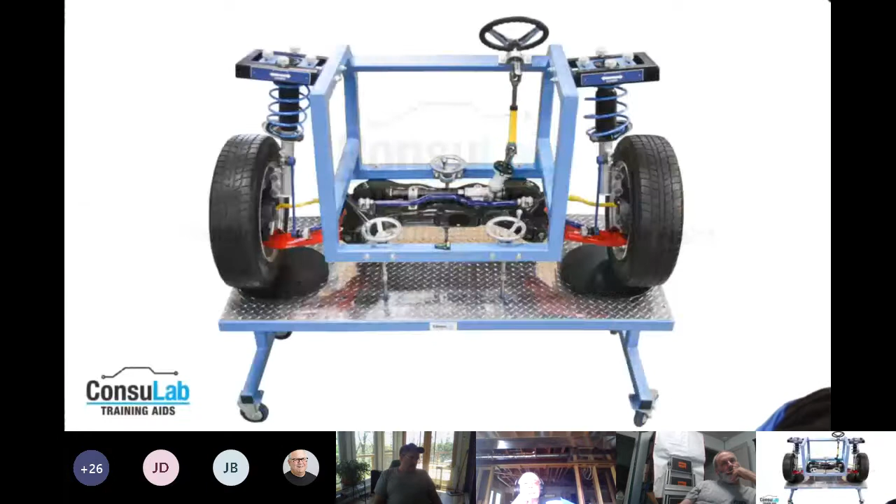So I'm going to switch to that. And again, here's the title that we're going to deal with, and what we're going to deal with here is using a lot of virtual shots of this trainer.

This trainer is our EM130 steering and suspension trainer. It's based on a Hyundai Accent, but it really wouldn't matter what vehicle it is because we've changed so much about it. A couple of things we've done is we've actually added adjustable plates to the top of the strut, so you can actually change camber and caster up there, which is not part of this car normally.

We've also got some adjustment handles here and on the other side that allow you to change the ride height of this. You can actually change the tilt of the frame, those types of things as well. And then it's all mounted on a rolling platform and has turntables below the wheels and tires. The springs on it are actually not springs, they're just a piece of plastic hose so there's no undue loading on steering and suspension as we try to use this.

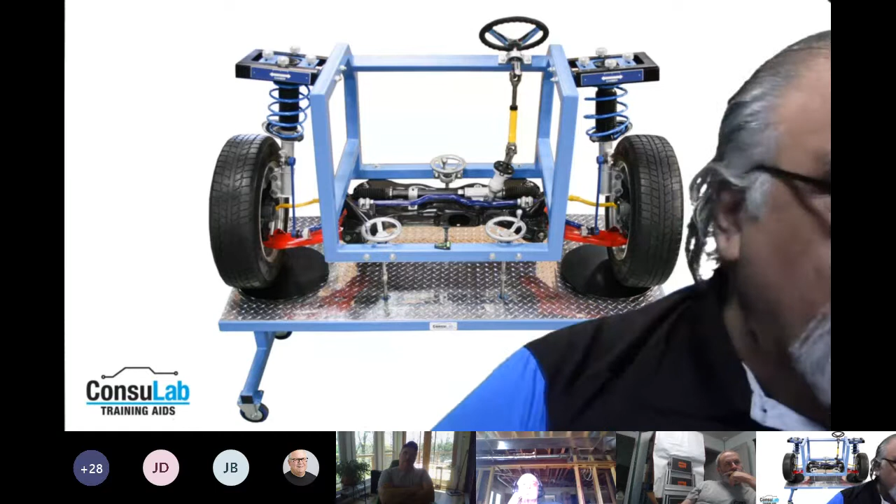So like I said, we've got that unit, but we're going to use a virtual version of it, and you're going to see me popping in and out. So this is just a side view of the same unit with the tire off, so you can kind of see the orientation. Facing the right-hand side of the screen would be the front of it, and the left is the rear.

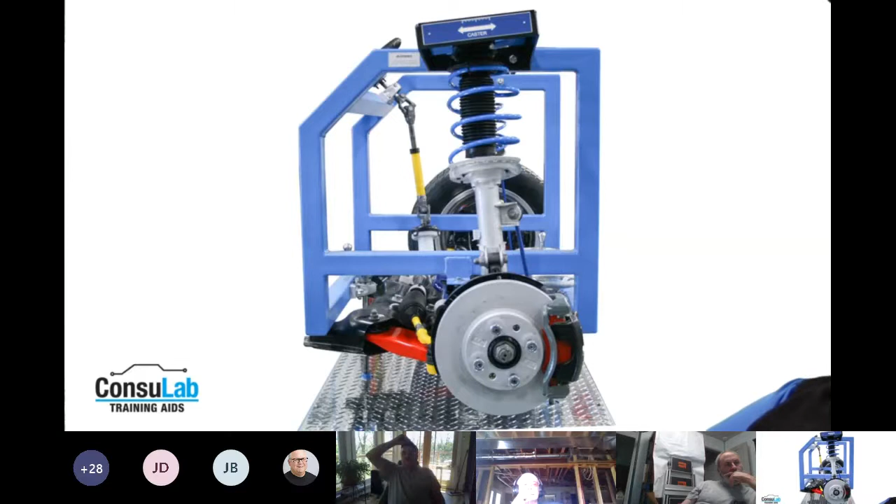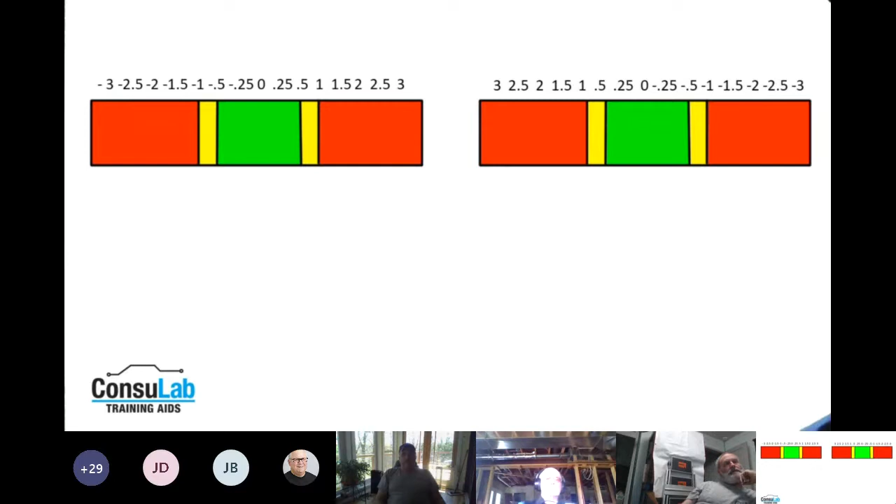When we start talking about wheel alignment, we start getting into our adjustments and our measurements. These readings could be in inches, millimeters, degrees, whatever, but we have positive and negative numbers that we're going to use, and we're looking for somewhere in that green area when we have a specification. Yellow is it's close and red is it's way out. But one of the issues we run into sometimes is tolerance.

Tolerance is one thing, and it's something I used to teach all the time, is take the factory specs and knock the tolerance down. As some guys have been talking just before we started, in ADAS classes now they're telling people that you need to start thinking about alignment, make sure alignment is very accurate, because if you've got a thrust angle in the vehicle and your cameras are pointing straight ahead, but the car wants to go off to the right or left, well, that's making a big difference in the adjustment of your camera angle.

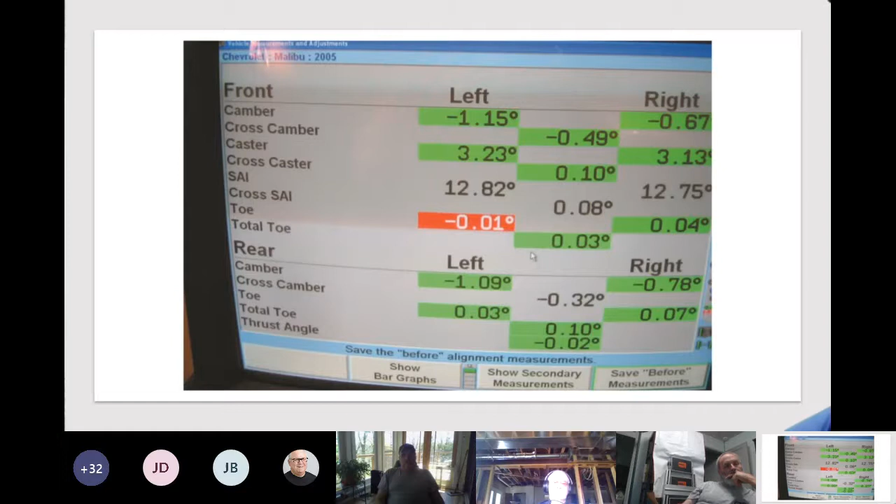We're talking thrust line, we're talking from the rear axle to the front axle. But if we're talking a control arm, we're only talking a foot to a foot and a half of distance. So we always have to consider that a degree, yes, is a constant, but the distance that a degree covers is always slightly different.

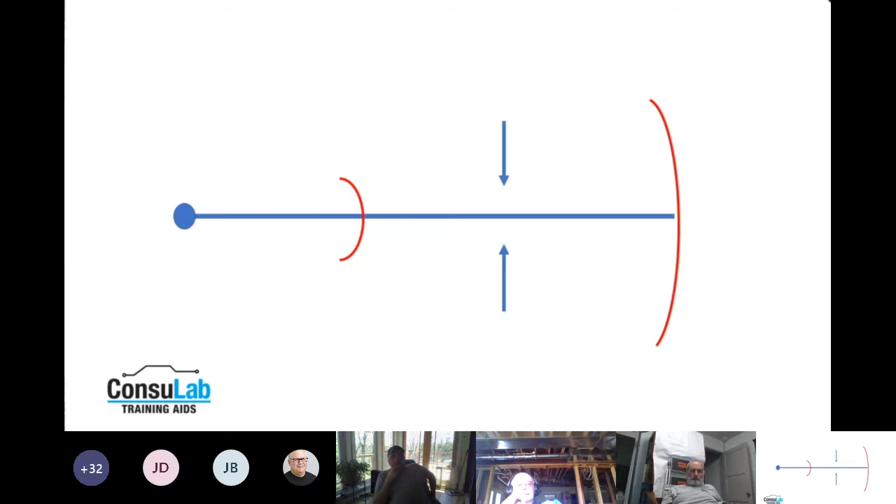Probably the angle we talk about the most would be camber, and the reason we tilt a tire is so that it forms basically a conical shape and creates this tracking of the wheel in a straight line as we try to hold it in place. Camber is probably the most common adjustment next to toe, and usually there are vehicles that have some adjustment for camber, but there are some that only allow you to adjust toe.

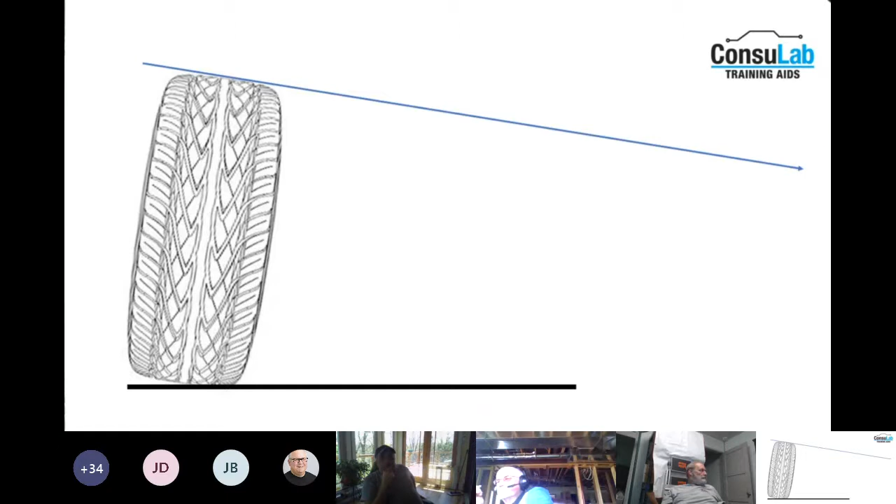Short, long arm suspensions have been around forever. Probably the only place we see them anymore is usually in pickup trucks, where we've got a pair of control arms that travel in different arcs. We've got a spindle mounted between them, the tire mounted on there, and the spring, typically mounted on top of the lower control arm between the control arm and the frame. That's how we support the vehicle.

Getting into the actions of this setup is something we maybe haven't talked about before, and that's instant center. An instant center is where we take the projection line of the control arms and find out where they meet. In this case, the upper and lower control arms, if we follow the projection line, meet outboard of the vehicle. This is referred to as instant center outboard.

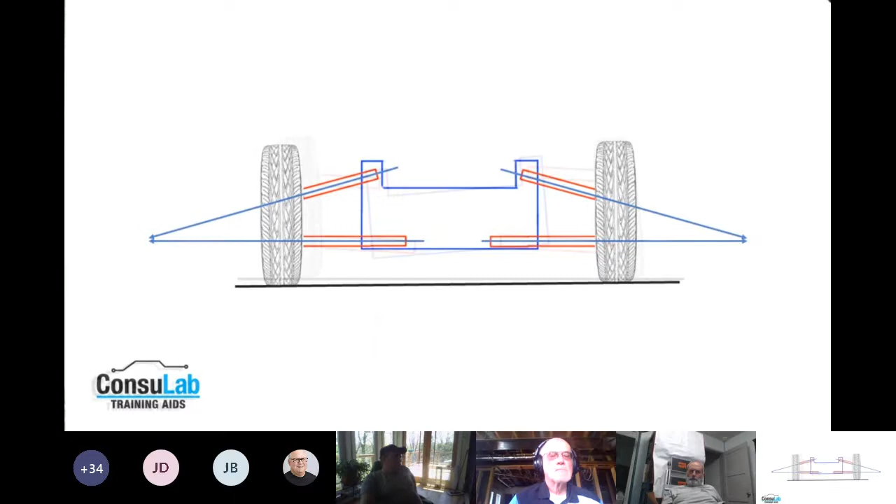In an instant center outboard setup, when we corner the vehicle, we're going to get the frame to actually lean over in the opposite direction we're trying to go. It also tends to angle the tires, changing the camber and causing them to lean out of the turn.

As an avid motorcycle rider, one of the things that's often brought up is that cars lean the wrong way. So cars tend to lean out of a turn. It would be nice to get the tires to lean into a turn.

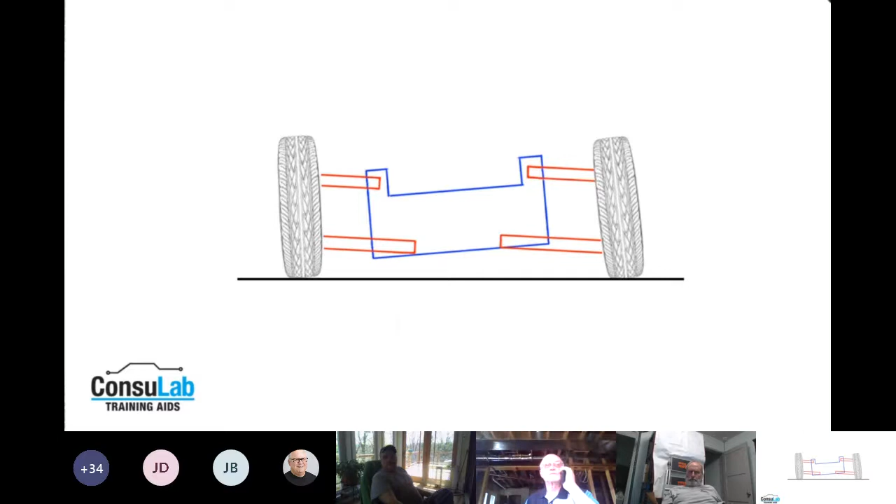So we can also do what's called instant center inboard, where we change the angle of the upper control arm, and now that intersection point is inboard of the vehicle. When something like this corners, we see that the tires are now actually leaning into the corner.

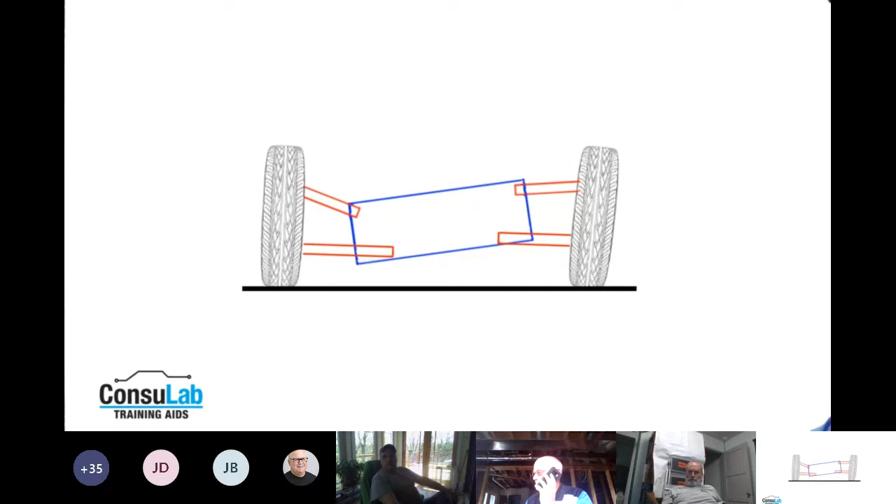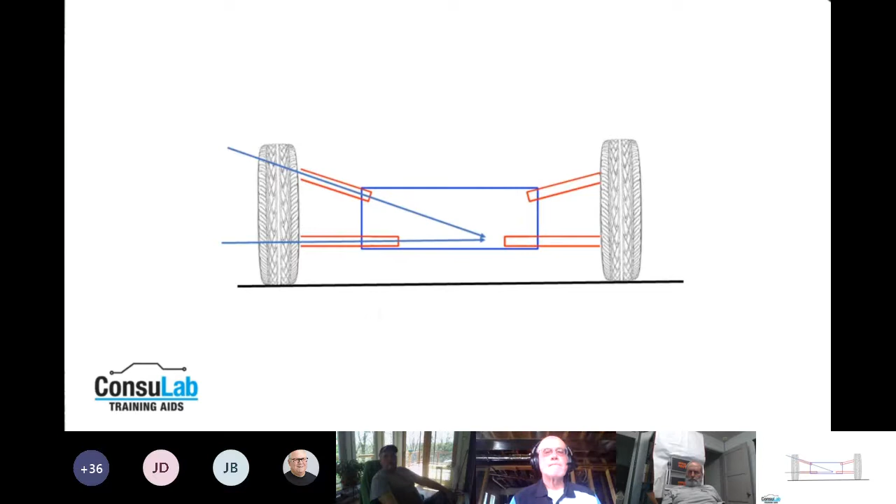One of the things about this, though, is that another piece not often talked about is roll centers. If we go too much instant center inboard, you'll actually end up with a higher roll center, so you have to be cautious about that.

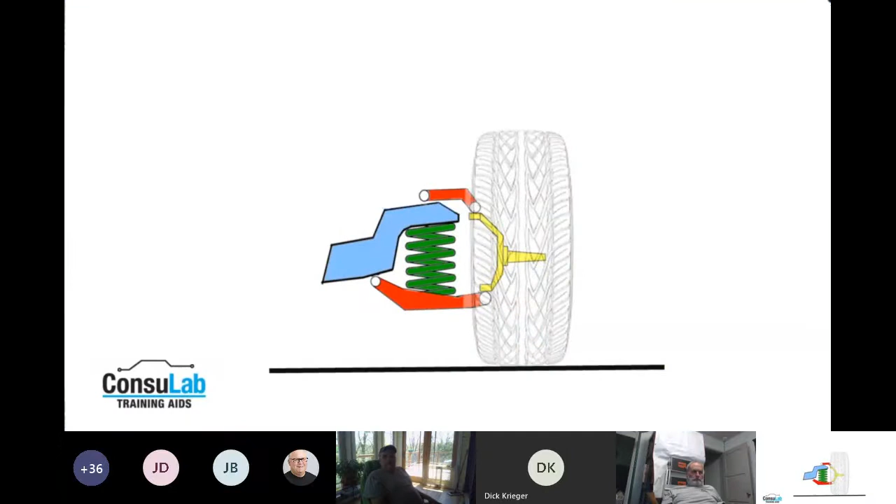So another thing we want to get into is steering axis. Short long arm typically has quite a bit of camber change as we cycle the suspension. You're going to start to see a lot of vehicles these days now use multi-link to minimize the amount of camber roll, or camber change, as the suspension cycles. This thing has multiple points of contact, usually 4 or 5 axis points, in a lot of modern vehicles. You do this in front and rear suspension, again to minimize the amount of camber roll.

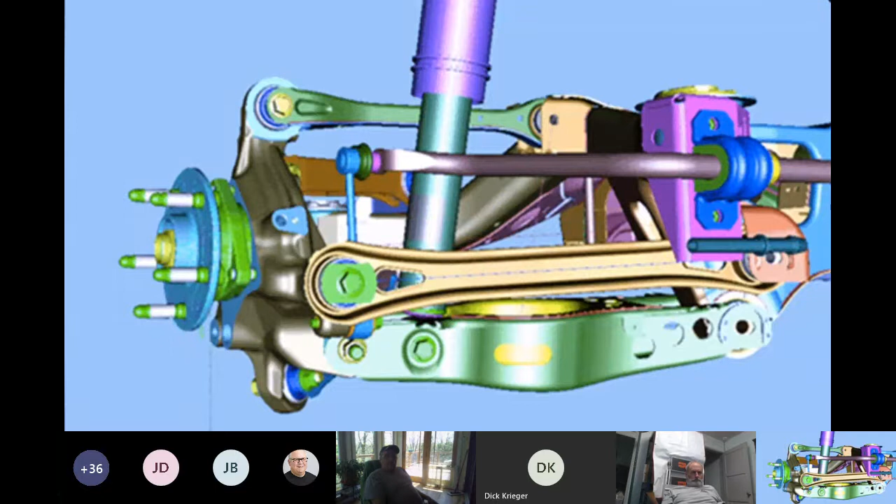As we go to a more common type of suspension that's been around for 30-plus years, the modified strut suspension, where we've got a coil spring and shock absorber unit built together, mounted to the steering knuckle and the lower control arm. This thing will also have its own camber change as it moves through. The lower control arm travels in an arc, but the upper mount of the strut is usually mounted in rubber or a bearing of sorts, and it's allowed to tilt a little bit as well. So we still have the issue of camber change, but not nearly as much with this suspension.

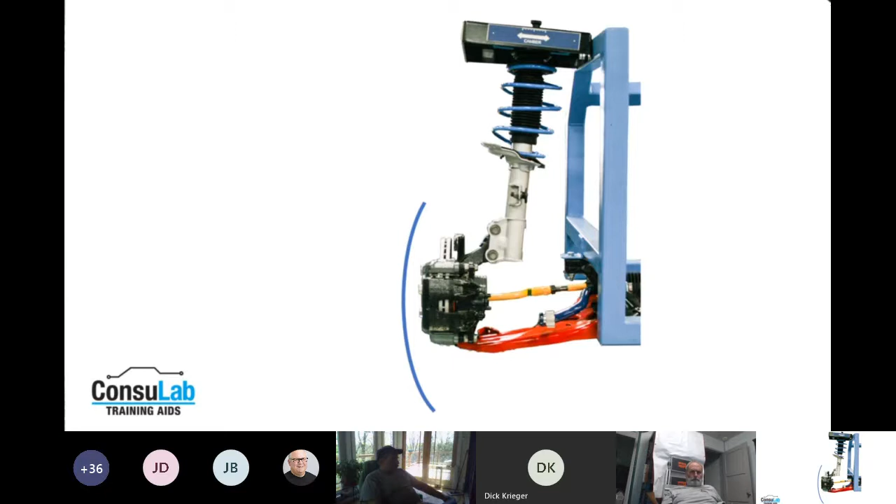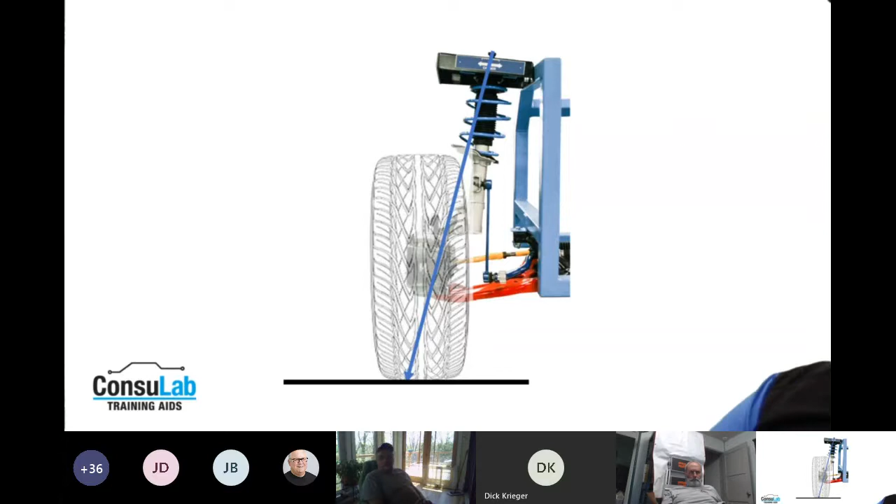By putting a tire on here, I want to get into discussing the next thing, which is steering axis inclination. Steering axis inclination is if we take an imaginary line and draw it between the two pivot points, in this case the upper strut mount and the lower ball joint. This creates a contact point where that line intersects the road, and then we compare that to the center line of the tire. If those two lines cross each other above the road surface, it's said to have negative scrub radius.

What the scrub radius does is create the pivot point that the tire pivots around. In this case, on negative scrub, where we're projecting the load to the outer side of the tire, that is now where the tire pivots around. And the negative scrub typically causes a toe-in tendency.

We started using negative scrub when we went to a lot of front-wheel drive cars, and we went to a diagonal split braking system, where if we lost half of our brake system, our proportioning is 80% front, 20% rear. This would actually cause the tire to pull into the vehicle instead of pulling away, thereby reducing chances of losing control. So negative scrub was brought in for a couple of reasons, but that was one of the primary ones.

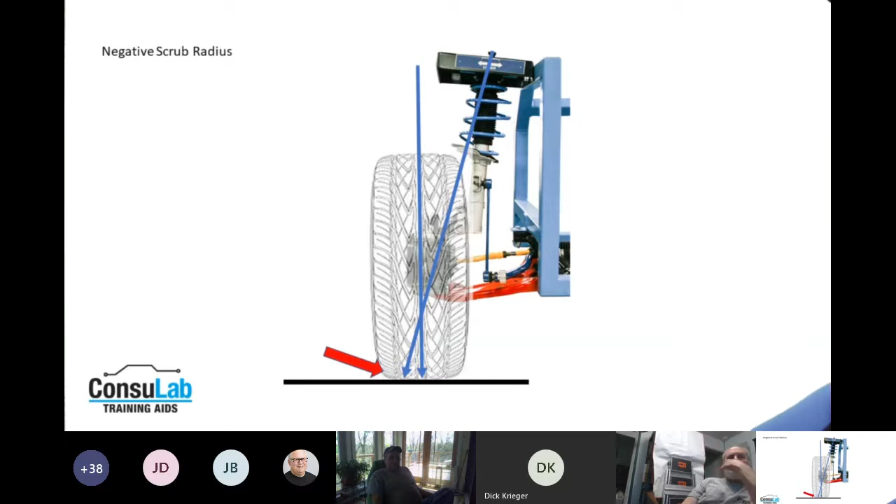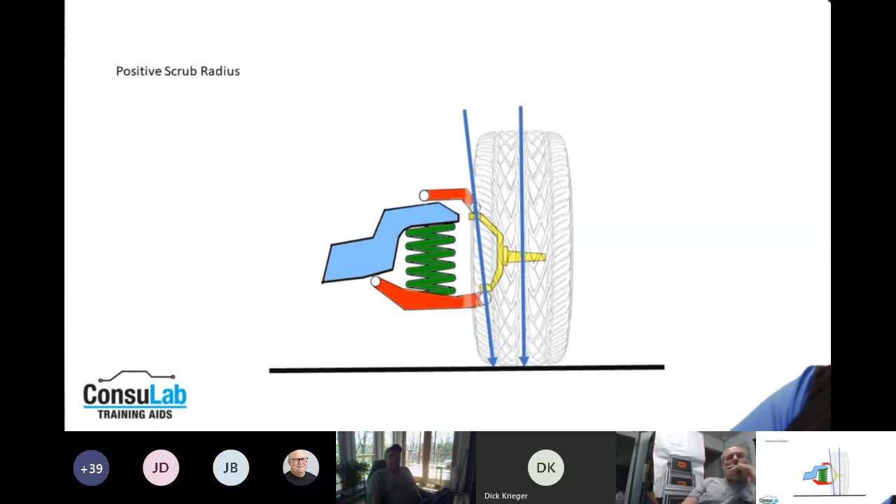If we go to the short long arm suspension, you can see now that the intersection point is going to be below the road surface. We actually call this positive scrub radius, and so there's our pivot point for this one. The natural tendency of this unit is actually to toe out.

So again, when we're teaching alignment, quite often we talk about SLA suspension and the tendency where you set toe in. Typically you do set toe in on an SLA because there's the dynamic function of toe: once those wheels get rolling down the road and start using this dynamically, they're going to toe out naturally because of that pivot point. So we typically set toe in on an SLA suspension somewhere in that 1/8 inch range. Then as the vehicle started moving, you're going to start tightening all of the steering linkage and hopefully get the tires going straight down the road.

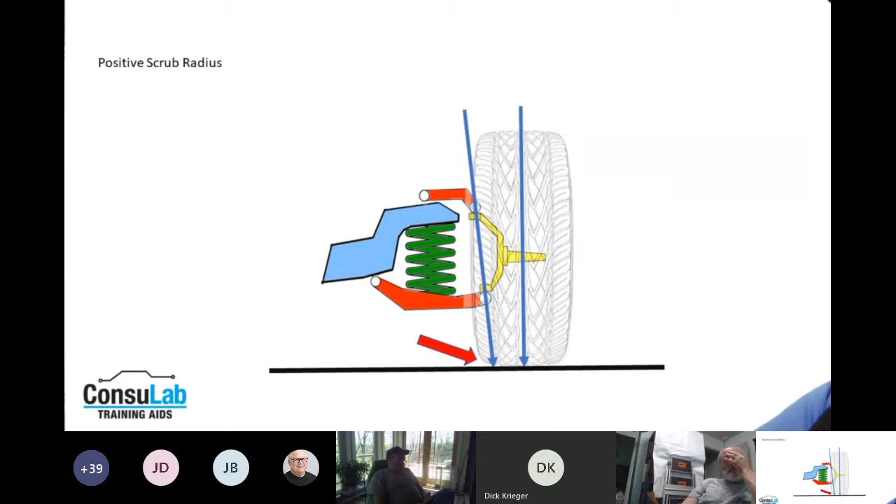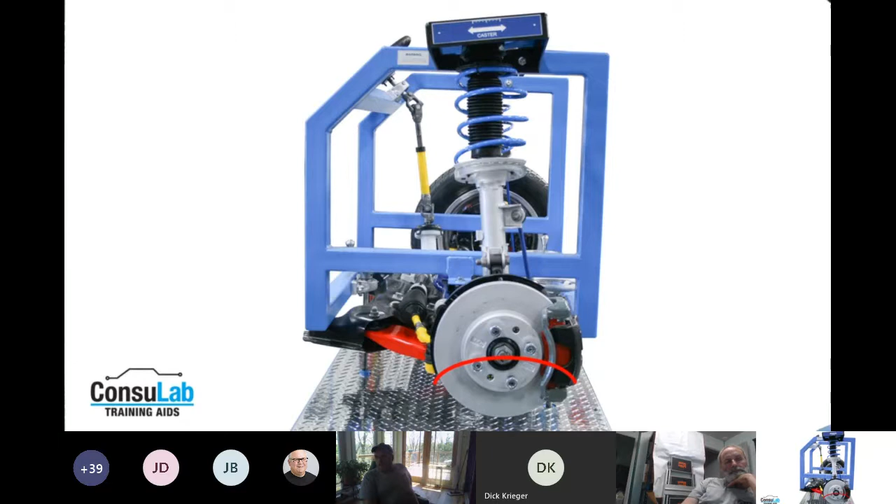So after you've completed a corner or whatever, this thing is going to want to return back to that point because that is the high point and the load of the tire pushing on that, and it wants to go in that straight ahead position.

Another part of steering axis inclination that we talk about is the included angle. Steering axis inclination is a measurement from the center line of the tire through the imaginary line of the two pivot points. But then we also have camber, which again is the imaginary line through the center of the tire and where we've got the tire lean to. So if we add SAI and camber together, we get what is known as the included angle.

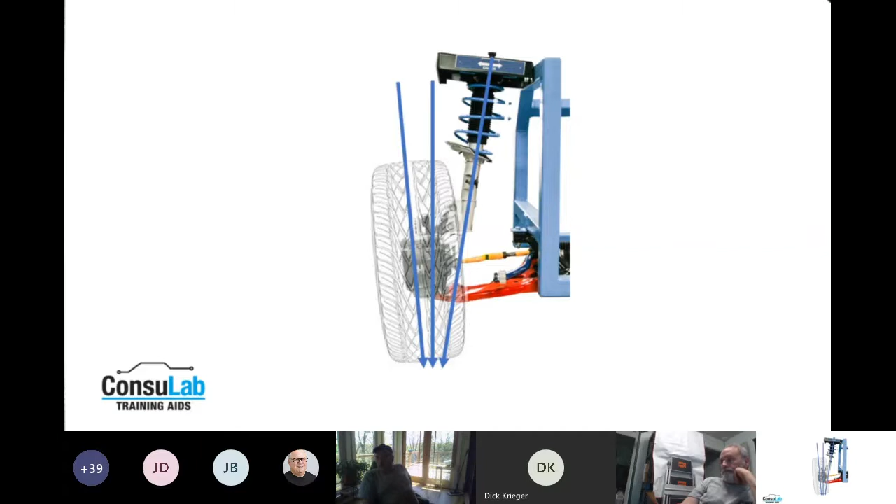Typically, camber being positive in this case, added to SAI. But there are times when you could have negative camber. So if you add a negative and a positive number, you actually end up with a smaller included angle than you have for SAI.

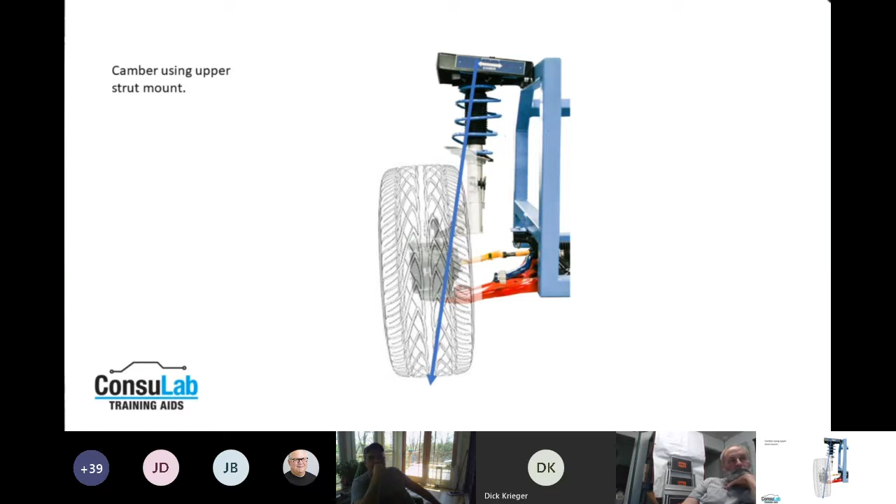Camber adjustments on front-wheel drive cars: there are some front-wheel drive cars that actually move the upper strut mount to achieve their camber adjustment. By moving the top of the strut out, we get positive camber, and our included angle is going to remain the same because it's a function of the SAI and the camber all put together. Because we're moving the spindle with it, the included angle stays the same, even though we are changing SAI and camber.

And same thing if we move it in, the included angle remains the same. We've changed SAI and camber.

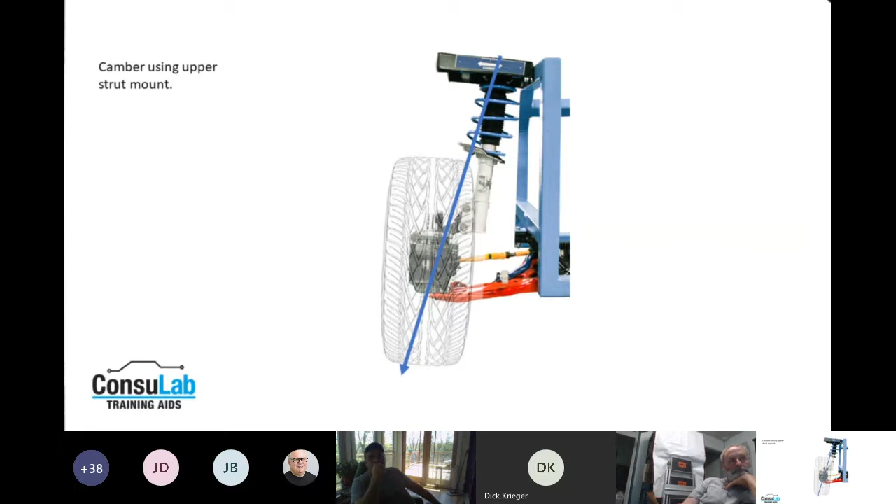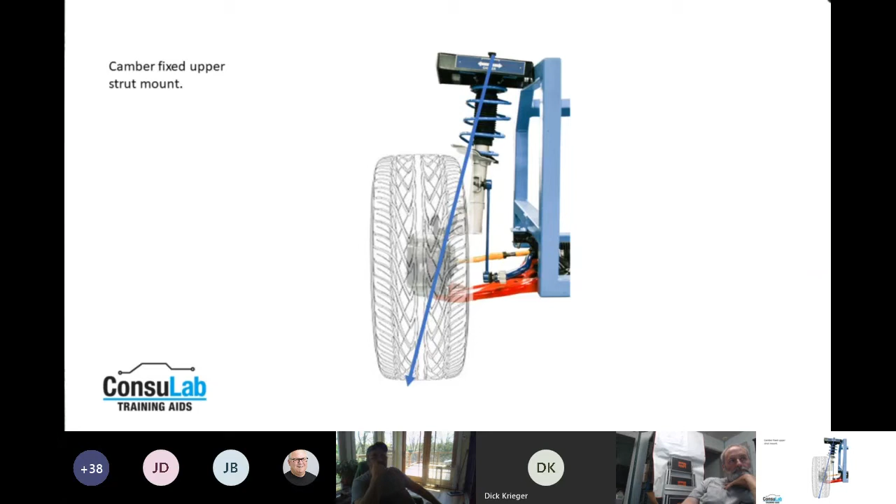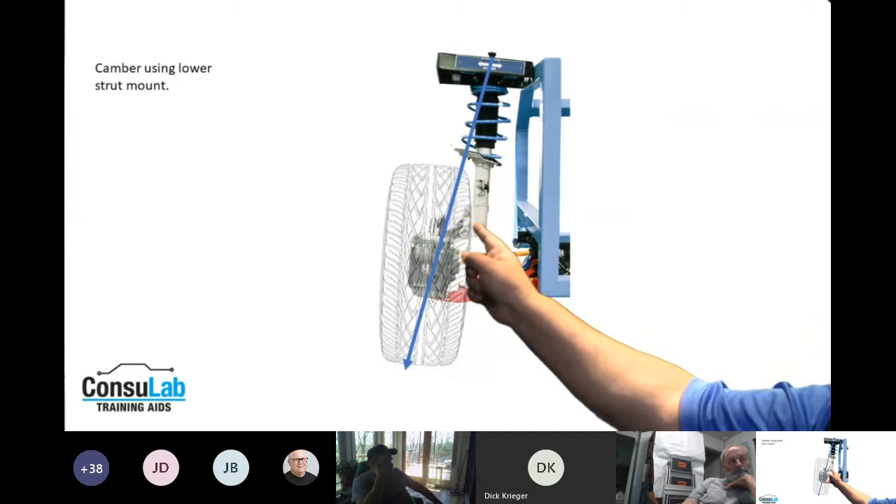If we go to a fixed strut position at the top and then adjust at the lower strut point, the lower strut point is where we might have an eccentric bolt mounted on one of the strut bolts, and that would allow us to tilt the wheel in and out. So that's what we talk about camber using the lower strut mount, and that's probably a more common adjustment.

Sometimes on cars that didn't have any adjustment, you can buy aftermarket kits to put in there and create this adjustment. So in this case here, we've angled it in. Now we've changed the included angle because we've actually kind of bent the system, since we're adjusting it in the middle. So SAI stayed the same now, but we've changed the included angle and the camber.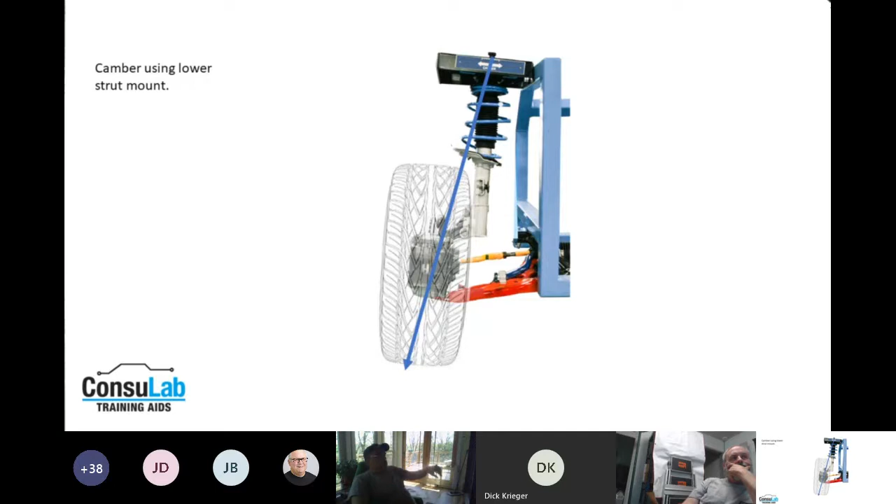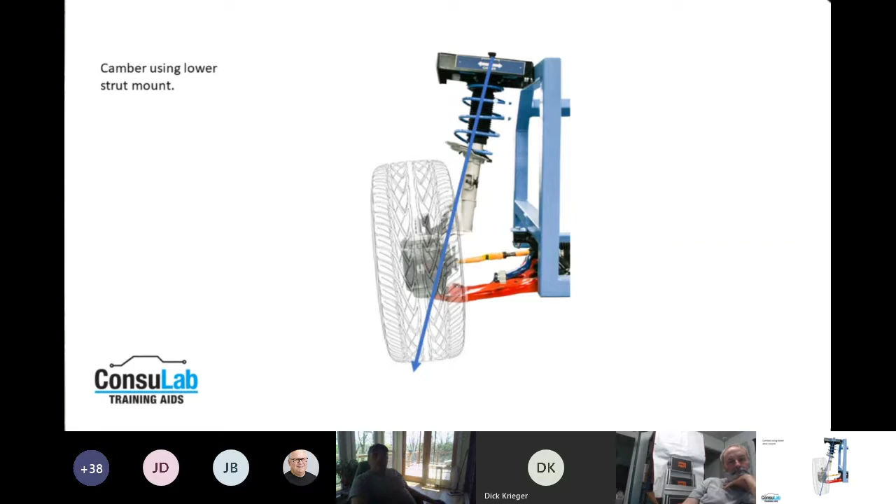And same thing if we move it out, the top of the strut is still in the same location, so is the ball joint. So now the SAI is still the same, but we've changed the included angle again. So those become important when we're doing diagnostics later, and something we're going to talk about tomorrow is getting into some diagnostics using this process.

Now, scrub radius and tires. When we talk about tires and changing tire sizes, we can start getting into scrub radius and the effects we have on it by changing tire size.

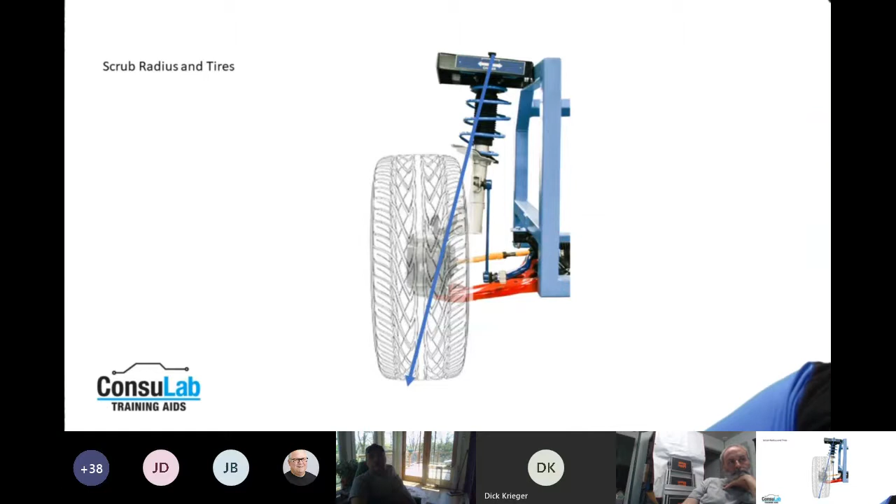For example, here I've put a larger diameter tire on here, not only larger diameter but wider. And what did it do to my scrub radius point? You can actually see that my load point hasn't moved. Oops, went too far.

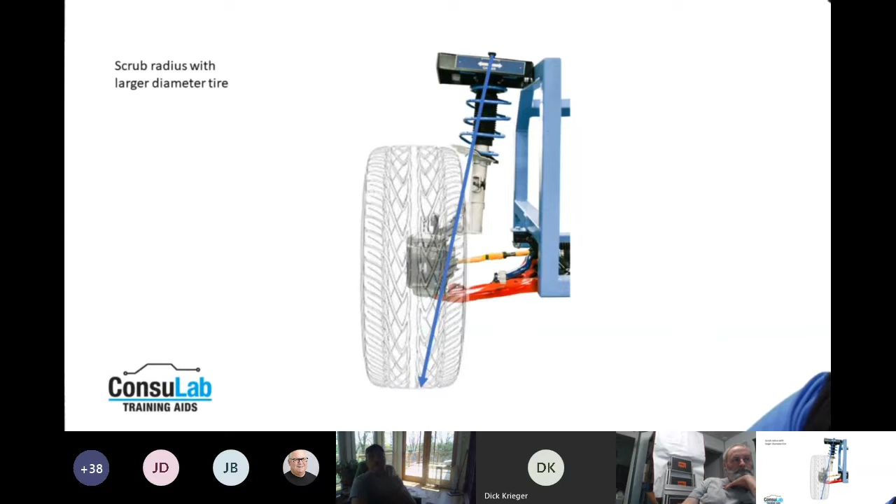Same thing if I go to a smaller tire. The place I'm projecting the load doesn't change, but the contact patch of the tire and its location can be affected by wheel offset, tire size. A lot of things can affect this without changing the adjustment at all. So it's something else to consider as people get into modifying vehicles.

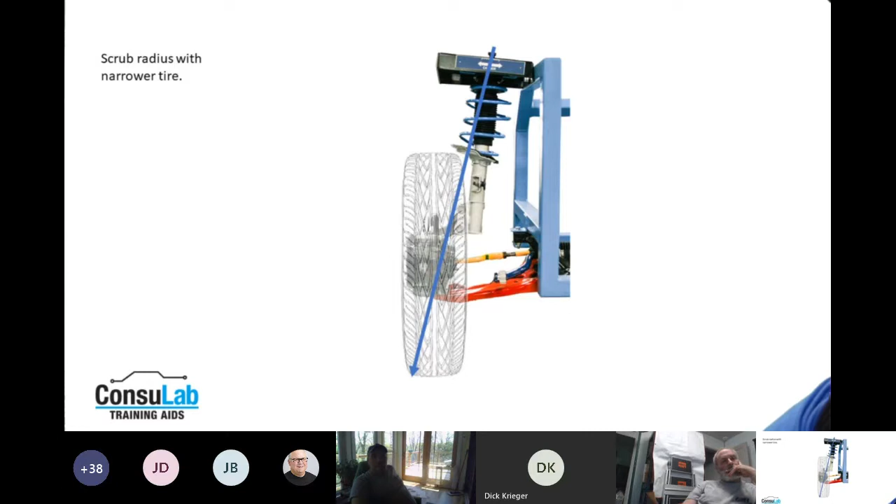Similar considerations here. If we get into changing things about this system, where we've got our upper and lower control arm, if we were to increase the offset of the tire, increase the diameter, increase the position. Other questions I have too about this would be, what happens if I decide I want to change the ride height of this vehicle?

A lot of people will say, well, you just put lowering springs in. But if you think about what lowering springs might do, we're actually going to change the angle of both my control arms. On top of creating an issue with ride, it's actually going to change a lot of the dynamics.

One of the things that may also be done is drop spindles, where we actually physically change the location of the spindle on the knuckle itself. So we can change the spindle so that we move it up here. And if we move it up there, that's actually going to lower the vehicle without altering anything else over here.

If I drop that down, so move the spindle down in location, we have to start worrying about clearance. But again, that could raise the ride height of the vehicle. So it's kind of weird when they talk about a drop spindle, that a drop spindle lowers the ride height of the vehicle, but we take the spindle itself and move it up on the knuckle to create a drop spindle.

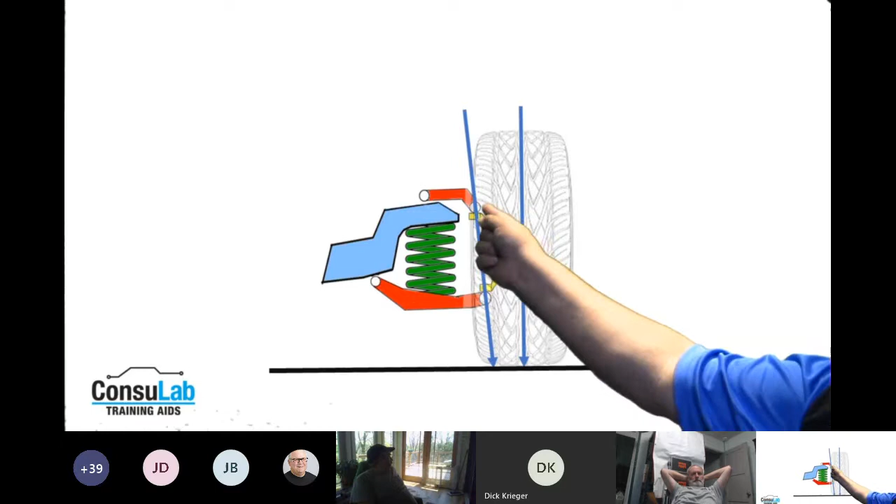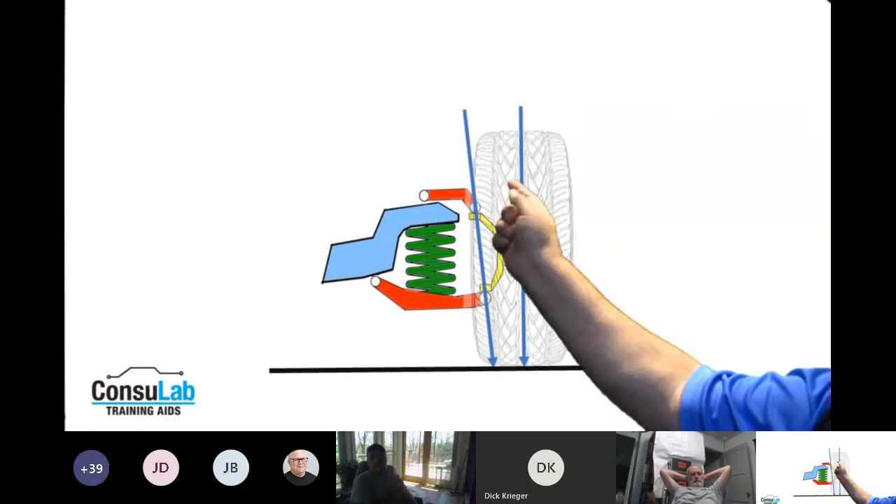And I talked about modifying instant center inboard to instant center outboard. One of the ways that's done is you can find kits for a lot of the older vehicles where you can actually get a taller spindle. So we get here and we can put a taller spindle, which is going to change where the upper control arm meets, and again change the arc path that it travels in. Some other ones are getting taller ball joints, those types of things as well.

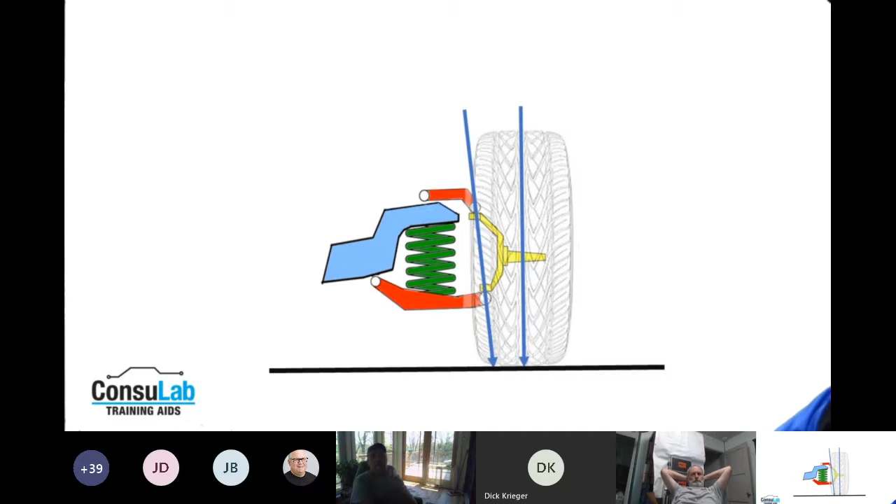So getting into using this for us a little bit. In this diagnostic scenario, we've got a vehicle that's come in and we get some readings off of it. And we can see here that we've got camber at -2 on the left side and camber of +2 on the right side.

Steering axis inclination of 12 on the left and 8 on the right. So the included angle, if we take the camber -2 plus the SAI 12, we end up with 10 degrees of included angle. And if we look over on the right side, we've got +2 and SAI 8, so we have the exact same included angle of 10.

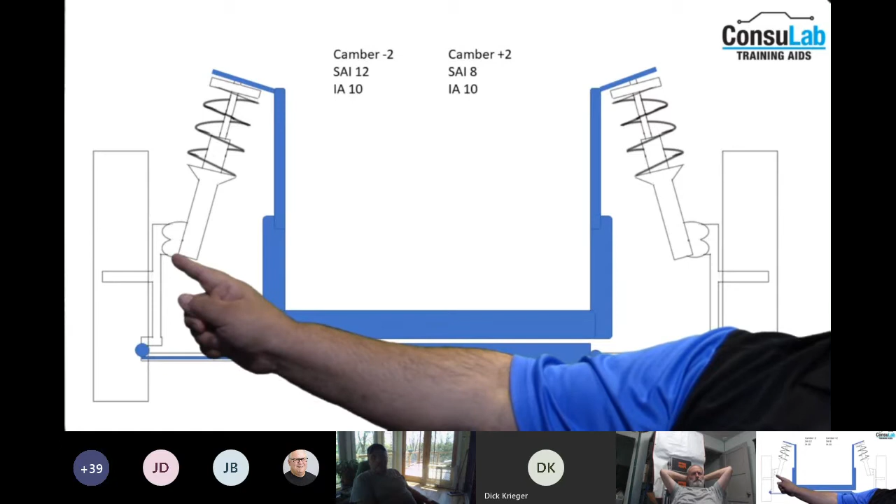So we're looking at this and it would be easy to come along and say, well, I need to adjust the camber on this wheel over here and use one of those kits. Let's say my spec is 1 degree. So I would put a kit in here and set this one at 1 degree positive, and put a kit over on this side and set it at 1 degree positive. And now I've got the same SAI, but I've probably changed my included angles.

So if I were to do that on the right side, my included angle is now going to be 9. And on the left side, it's now going to be 13. So there might be a better way to correct this.

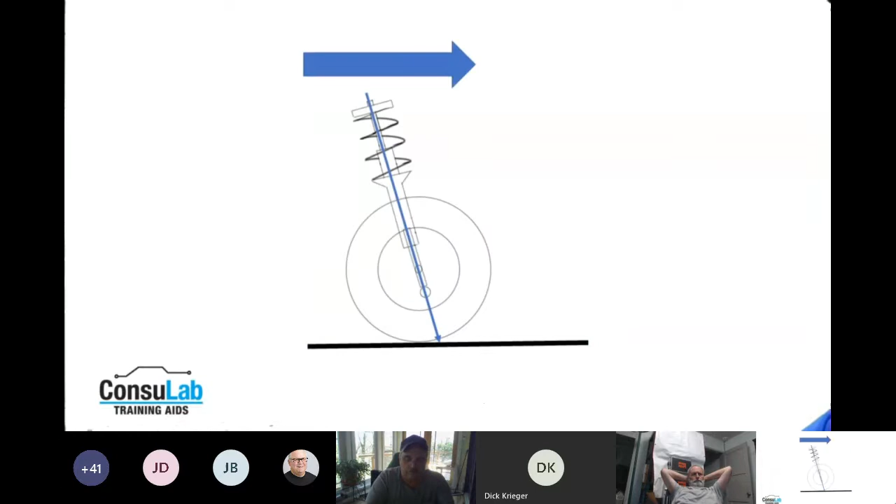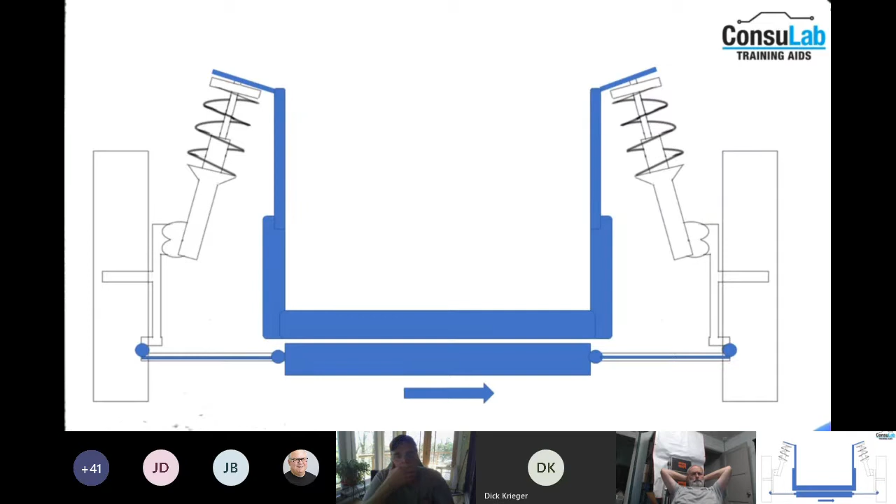If I were to take and move the cradle itself along the unibody, I could actually shift that over. And that's now going to move the bottom of the right-hand side out and the bottom of the left-hand side in. And if I go back to this picture, if I move the bottom of the right-hand side out, that's going to reduce the camber and increase the SAI. So now if my number is 1 degree positive camber, and SAI would now increase by a degree, which would be 9, I still have the same included angle of 10.

On the opposite side, I've pushed it again over that 1 degree. My camber is now going to change, SAI is going to change, but the included angle would again remain the same. So in this case, when a vehicle was non-adjustable, it was a matter of something being out of place.

So that's one scenario where we can actually use this as a diagnostic and get into reading these numbers. Now, when you go to do an alignment and want to get these numbers, on most alignment machines you can set it up to measure SAI while you're doing your caster sweep.

You actually have to request it. In my experience with a lot of alignment machines, various ones will do it different ways, but I usually used to say to measure SAI and included angle. One of the other things we used to do, to take suspension loading out of the question, was actually do a raised measurement. With a lot of Hunter equipment, you could raise the vehicle up and do your caster sweep with the wheels in the air, so you'd get all of these measurements without suspension load affecting them.

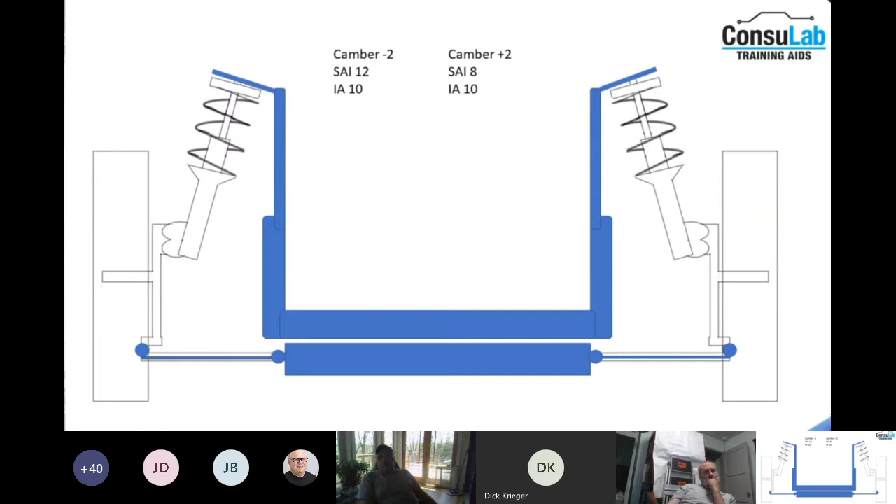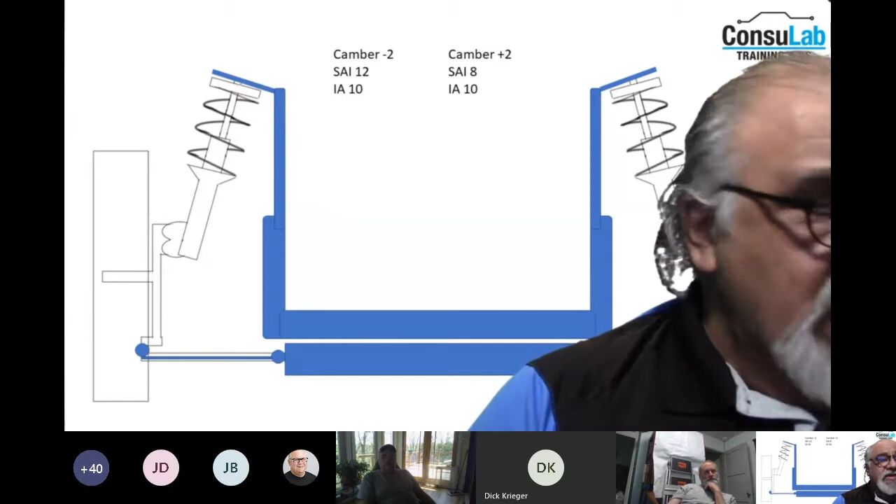Now, the second part of this, which we're going to get into, is talking about caster change and how that affects camber, and some of the other things that go on with our dynamic wheel alignment.

You've got 3 minutes, Rick. Yep. Tell me when you want to put that sign up.

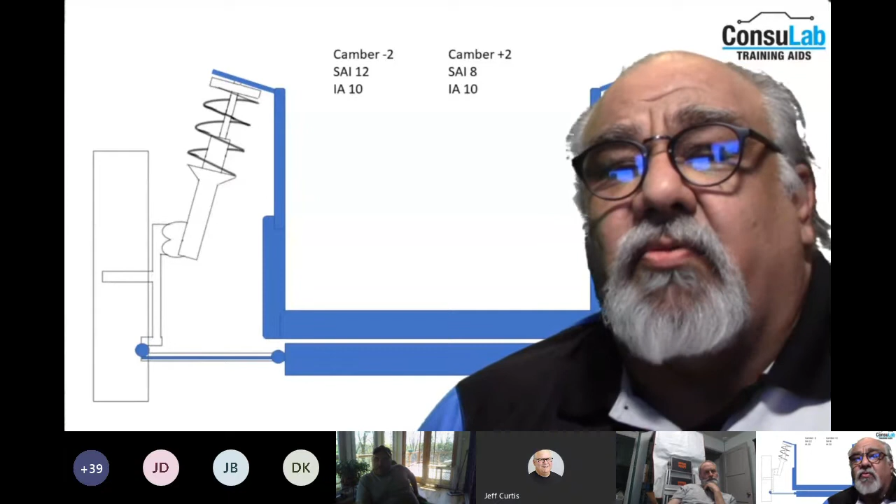Yeah, so I think we'll stop there for the day, and we'll get back to put up the piece that you've got, Jeff, and then we'll show that. And then, like I said, we're going to continue with this tomorrow and carry on the conversation.